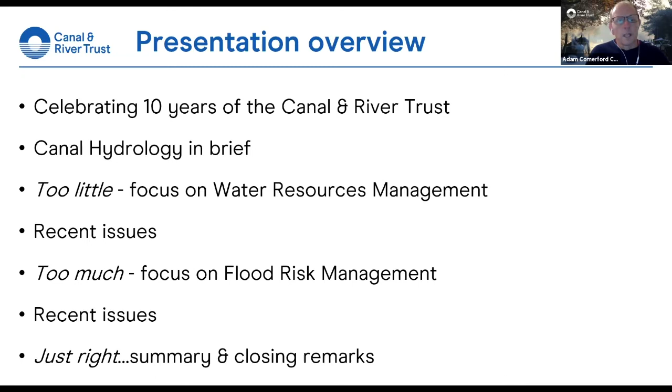I'll then go on to talk a little bit about what happens when we have too much water, which probably will be not far away if weather patterns carry on as they are, and some of the issues we've had with excessive water in our system. And then really just wrap it up with some closing remarks, a summary and a chance for questions. And then I'll hand over to Neil. So if I just get this started, it's a short presentation. You may have seen it if you attended the Trust annual public meeting, but I'll run it anyway. It's only a couple of minutes, so please sit back and enjoy this one.

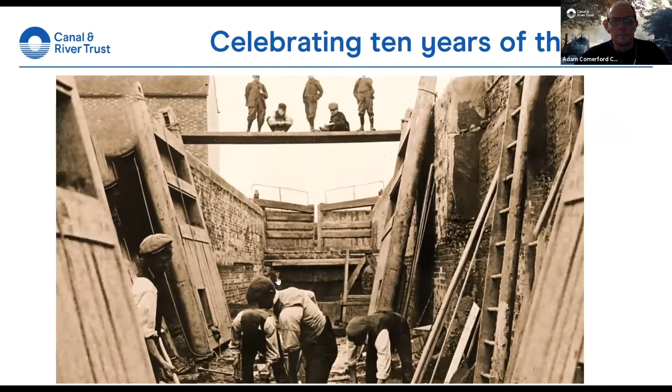More than 200 years ago, great engineers and thousands of navvies made something truly spectacular. They achieved feats of industrial engineering never encountered before, taking water up hills, across valleys, powering the industrial age. When they were creating this 2,000-mile network, the finest example of industrial heritage in the world, they could never have predicted the role that canals would still be playing in our lives over 2 centuries later. Stretching from London to Lancaster, Brecon to Boston, the former motorways of the nation are continuing to shape the lives of millions of people today, but in new, completely different and exciting ways. They're giving us somewhere we can live, relax, visit, get active, spend time together, get close to nature.

Today there are more boats and people on the water than ever before. Our canals are not just about the past. They have the potential to help power our future too. They provide a vital source of water to help our crops grow. They're a source of renewable energy. They support a wide range of businesses and jobs.

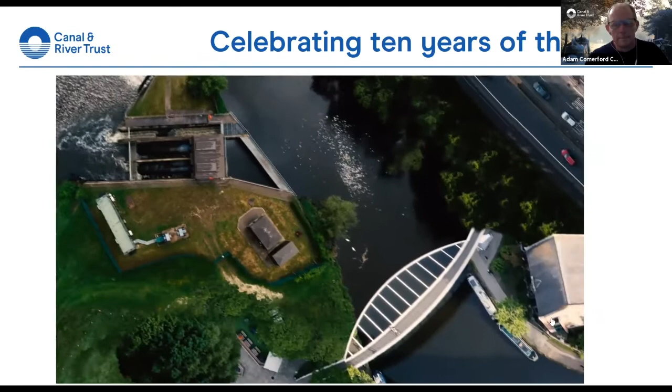Using the energy stored in the water, they're helping to keep our cities cool and our homes warm. Broadband cables, gas pipes, electricity lines tucked under towpaths and bridges traverse the country, bringing energy into our houses and businesses. And making this happen is one charity, a charity powered by millions of supporters, Canal and River Trust.

We are the people making life better by water. We are the charity that provides much needed green and blue spaces in our most built up areas. We are the charity caring for these historic, precious and fragile structures out in the open, exposed to the very worst that our weather and climate can throw at them. We are the engineers, the lock keepers, the litter pickers, keeping these waterways open and bringing them to life for boaters, for local communities, for you.

Our amazing charity cares for these wonderful waterways, but more help is desperately needed. Your donations, your time, as well as the vital support from partners and government if they are to survive and thrive. So we all have a back garden to call our own, a special place on our doorstep to use and enjoy. Together, we can make it happen. Together, we are Canal and River Trust, making life better by water.

So hopefully that sets the scene for just why the Canal and River Trust role is so important. But within that, water is the lifeblood of our canal network. If we don't get the right water supply in the right place, then we really do struggle to deliver all those things we've just seen on that video. I'll talk a little bit about the basics of canal hydrology, and many of you on the presentation this evening will be fully aware of where the water comes from, but some of you won't. So I'm just going to spend a little bit of time explaining the complex interactions we have with our water supply system across the Trust's network.

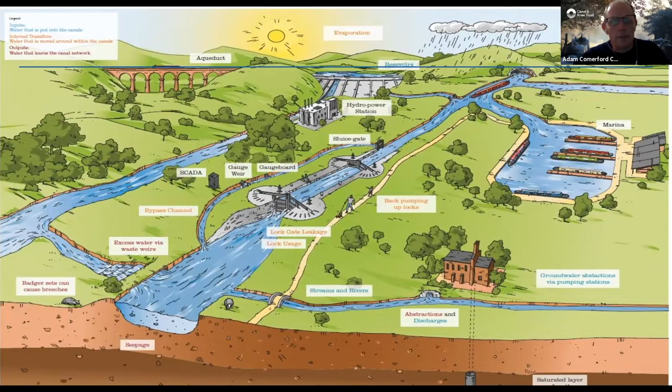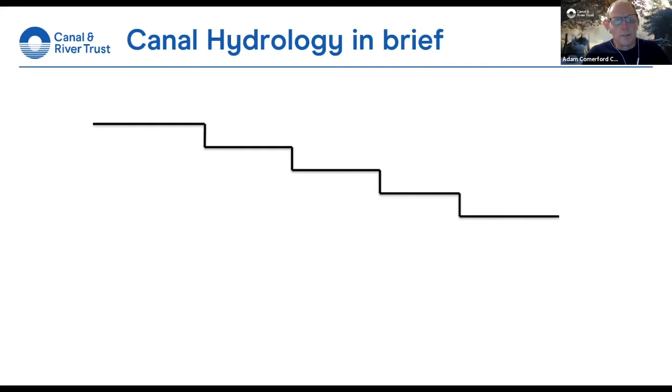This diagram shows a few examples of where the sources of water are, how they move around, and perhaps helps people to visualize how we manage water. Another way of expressing it, and this is a slide I've used a few times, and probably, Roger, it may have been one I used 5 or 6 or maybe even 10 years ago, but it really gives a snapshot of the basics of canal hydrology and why the challenges are so complicated at times. When we look at our canal network, we talk often about summit pounds, and we talk about the challenge of putting water into the system.

We've got around 70 reservoirs, 72 reservoirs that supply about half of our water resources overall across the Trust network. Some canals have lots of reservoirs, some canals don't have any reservoirs at all, but together they add up to about half of our water supply. Groundwater can be locally significant. That's water pumped from deep underground, and that does add up to only about 7% of our total water resources, but it's very useful, and it can weather the storm, so to speak, of droughts. If I'm mixing my metaphors a little bit there, because groundwater can be much more resilient in the face of periods of prolonged dry weather.

We do rely heavily on what we call feeders. So those are streams and rivers that are pumped or fed by gravity into our network, and that adds up to over 30% or around a third of our water supply for the system that we manage. And I'll talk a little bit more about some of the challenges we have with feeders in a few moments. We also benefit from what we call discharges into the system. So there are a number of places where we receive treated effluent and other runoff into our canal network. Sometimes we actually get revenue, we get money for receiving that water, and that can be particularly useful because where it flows into our system, that can be a useful source of water.

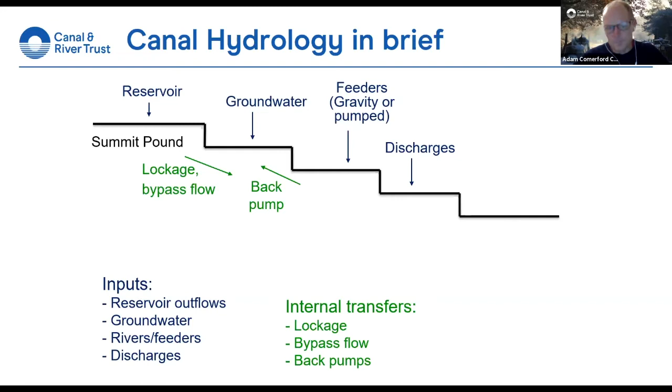Once it's in the system, water moves around with lock usage, so what we call lockage, and bypass flows, water passing around locks. But also in some locations we have back pumps, so we can recirculate water and move it back uphill to be used again for boat movements through the locks. And why are we doing all this? Well, the main reason is because canals use and consume water.

So one of the biggest uses of the water is the losses. Our canals are 200, 250 years old. They're not always lined. The water does leak and seep through the bed of the canal. It always has and probably always will do. But on top of that, we get evaporation, we get vandalism, we can get boater misuse where paddles are left up and water goes to waste.

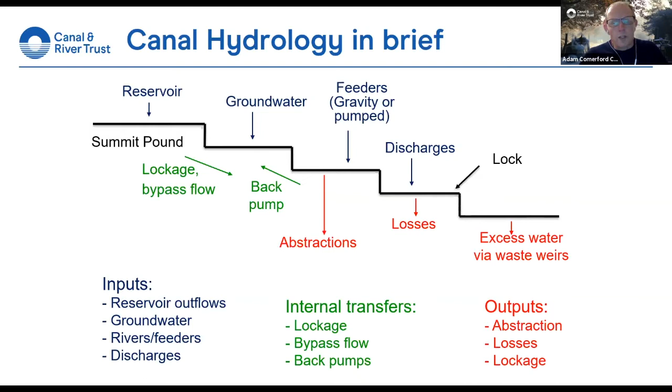We also have to supply water for abstractions, but we only do that where we've got surplus water. And if we're not using that water and it's not being lost through evaporation or some of the other leaks and seepages that happen, then excess water will eventually find its way back to rivers and streams via waste weirs, or perhaps in the case of some canals, exit points into rivers and estuaries or docks. So this slide really shows some of the complex interactions and how we manage them on a day-to-day basis.

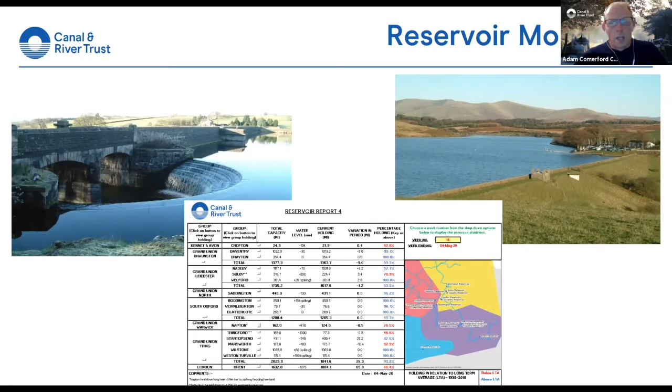One of the first things we do on a weekly basis is monitor what's happening with our reservoirs. So with those 72 reservoirs I talked about, every week we're recording the water level in the reservoirs. We're working out exactly how much water we've got in each reservoir from one week to the next, looking at that change over time. And we report that internally. We put it on our website once a month for interested individuals and organisations to look at, to see how our reservoirs are faring in the face of drought events. But also sometimes our reservoirs have to get drawn down for engineering works as well.

And that reporting and monitoring of pump usage is very important, because the energy costs of doing this pumping are very significant. We spend about £2 to £3 million a year, and that's based on previous figures. The most recent year, once we get to the end of 2022, will probably be much higher because of the price of energy. So the reason to spend all that money is obviously to keep the canals at the water levels we need for navigation, and that's a critical part.

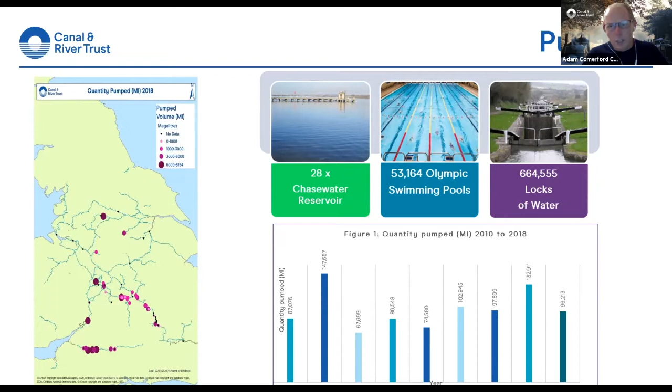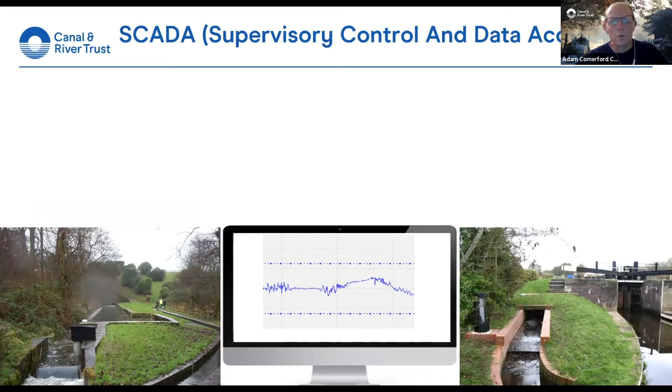And one of the things is the pumps rely a lot on what we call SCADA. SCADA is our supervisory control and data acquisition system. So in simple terms, it's telemetry. It's those little black boxes you can see on the two pictures at the bottom of the screen. Little black boxes next to the canal, scattered all over the place. 600 of these record water levels and flows, and they measure how many times locks are used. And we can get that data from the telemetry system onto our computers, onto our phones in real time. We can download it and we can look at that information.

It also triggers automatic alerts and alarms. It tells our local teams if there's high or low water levels, or perhaps a failure in a critical piece of equipment. And it also controls sluices and weirs and pumping stations. So these things are operating 24/7, 365 days a year. They don't go on holiday.

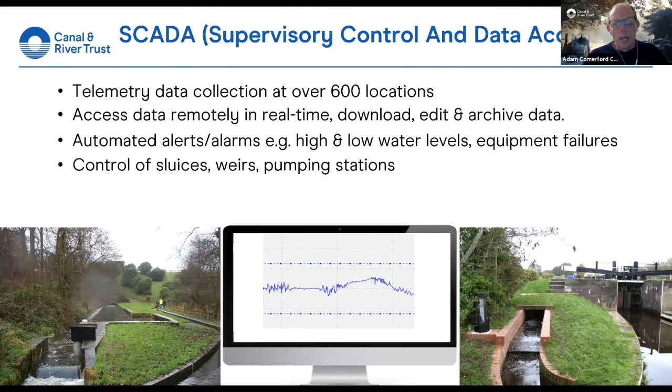And anyone in the trust can have a look at this data and can click on any of the points and see more information. You can see the trends of the long-term pattern of data, and you can configure the alarms and the settings all from the comfort of our laptops or our armchairs.

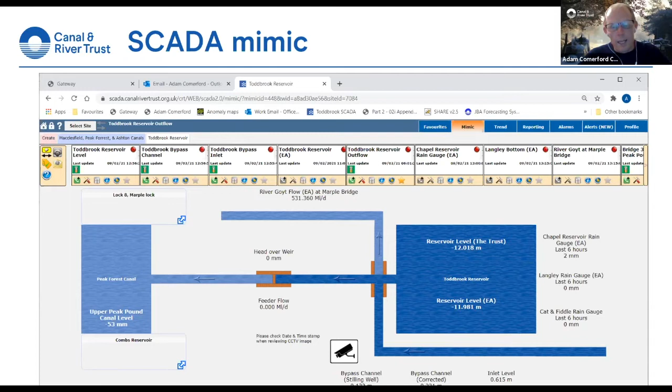And one of the things that we record through the telemetry system is the lock usage, so what we call the lockage, and we produce an annual lockage report. A lot of users find it's particularly interesting to see which are the busiest locks on the system. And we've got about 170 places where we record lock usage across the network.

Although there's about 1,500, 1,600 locks, we don't have a lock counter everywhere, but we've got them on all the key lock flights. And the simple assumption is that if a boat goes through the top lock, it probably will travel all the way down through a lock flight. So if we measure the lock usage at the top lock, that's probably representative of the lock flight usage.

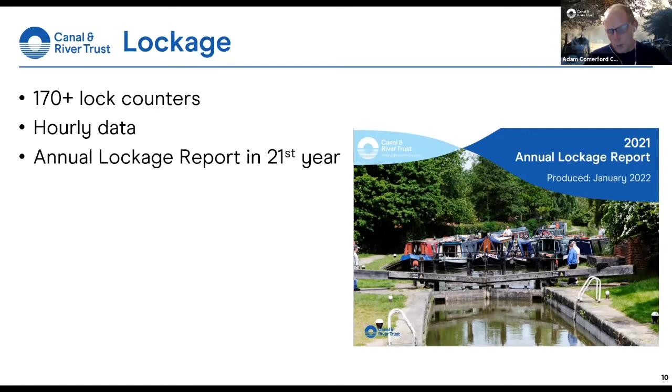It records hourly data, so we can get a real snapshot. We know which locks are being used at 5 in the morning on a lovely summer's day, or which ones are still being used at 10 o'clock at night on a summer's evening. And we've been producing this report now for 21 years. So pretty much my entire career of working with the trust, we've been producing this report showing that trend and that change in lock usage over the period.

And one of the things we try and do is obviously help inform things like the lock gate replacement program, because those locks that are used more often are going to take more wear and tear, more bashing and battering with use, and will probably wear out more quickly. So Neil will talk later about how we do our inspection program and how we prioritise, and the lock usage data is one of the factors.

It's a continual process, and again, Neil will talk about how many winter stoppages we do and how many lock gates or lock leaves we replace each winter, but it's somewhere around 120 typically. It varies from year to year.

Lock gate leakage can really cause an impact on our water resources, and especially where we've got back pumps, it's very inefficient to be pumping water in a circle, just pumping water above the lock for it then to leak back through the lock gates. It's really important that we prioritise our investment in lock gates, particularly where we're incurring expensive back pumping.

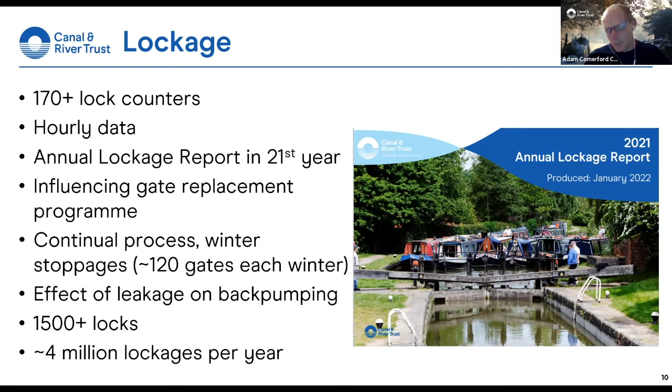And like I say, the 170 lock counters basically give us a representative sample of our 1,500 locks. And in total, that adds up to over 4 million lockages per year. So all those lock gates are taking quite a pounding. And it's a great statistic in terms of how well the network is being used and enjoyed by boaters and boating taking place across the entire 2,000 miles that we care for.

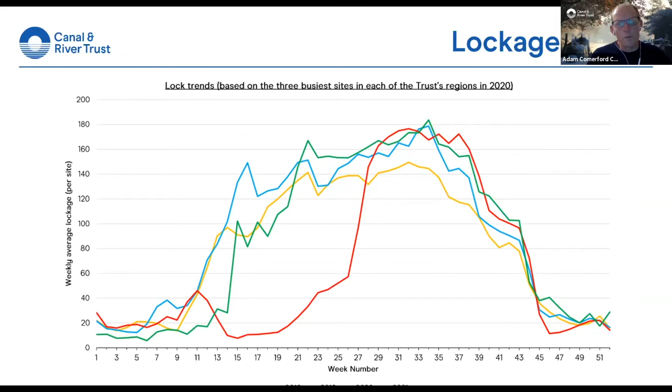But when it comes to managing water, whilst a lot of the work we have to do can be very reactive from one day, one week to the next, we also try and have a much more strategic approach. So there is a long-term plan. And what we've got in place and we're currently reviewing and renewing is our water resources strategy. So the last strategy we had was covering the 5-year period from 2015 to 2020.

And it really set out for the first time for the Trust exactly how we manage water on a day-to-day basis, but also how we're looking at the long-term pressures on our water, things like climate change, and how that could really impact on our allocation of water. And we do that in our water resource strategy by subdividing the network into what we call hydrological units.

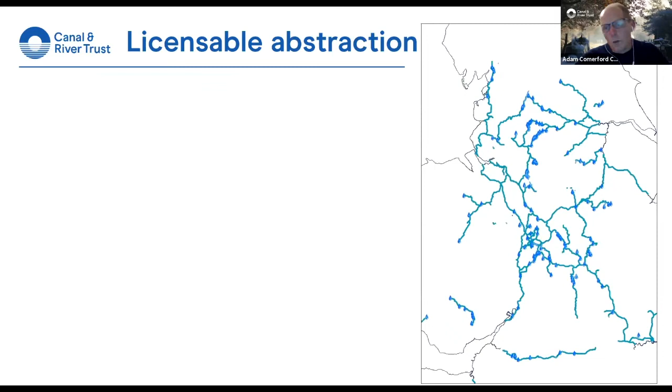And that could include a restriction on how much water we're allowed to take, when we're allowed to take the water, how we record how much water we take to supply the canal network. So it's a significant extra burden for the trust. And it really does potentially affect our overall water resource reliability for the long term, because we are now part of this regulated licensed system. And those abstractions which are licensable are all over the country. There's about 155 applications that we've submitted.

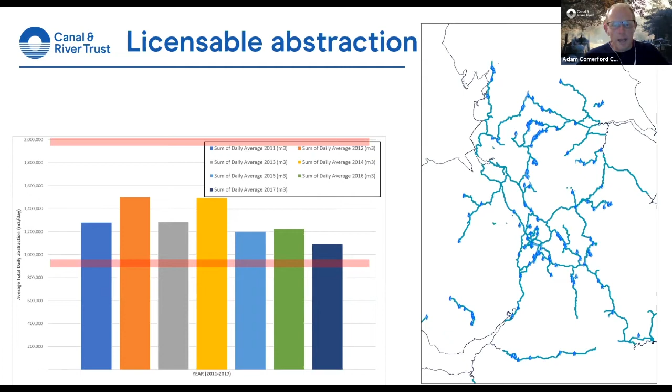That's how responsible we have to be, because the scale of our use of water is very significant. And it's no surprise that the regulators, the Environment Agency, are certainly asking lots more questions now they've seen this data set, just appreciating how large our abstractions are and how significant they can be, particularly in some catchments.

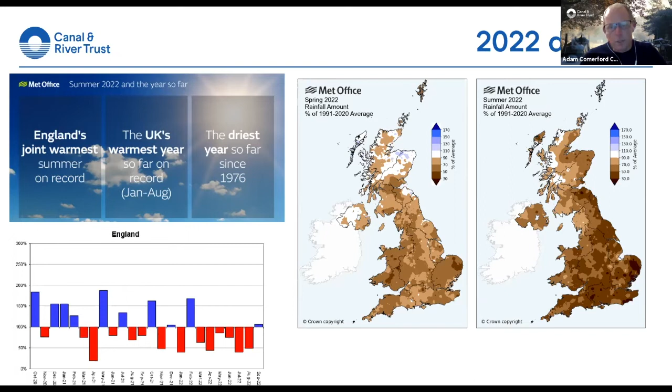The maps on the right show just how dry it's been. So the 3 months of spring and then the 3 months of summer are shown on these two maps from the Met Office. And basically, the darker the brown means the drier it was, and it's expressed as a percentage of the long-term 30-year average. So you could probably say it's no surprise that we've had hosepipe bans for many millions of customers of the water companies in England and Wales, and why the Trust has faced some significant problems of water resources supply for our canal network.

The driest August since 2003, in England at least, and so the driest August, and as well as the driest summer, the hottest summer, the driest 7 months. There's plenty of superlatives and stats I've put on the page here. And really, August was an exceptionally dry month, and September also. Through October, we started to see some signs of recovery, which is very encouraging.

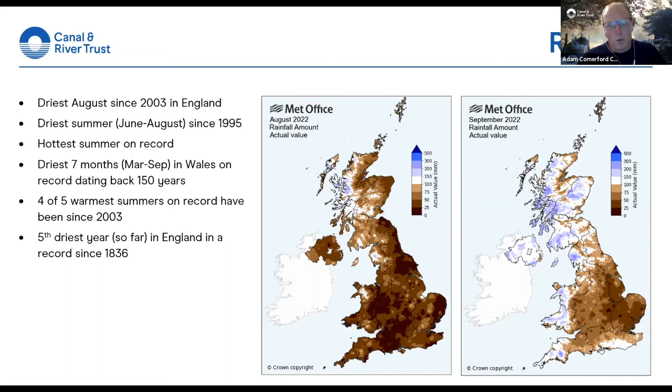But it's that prolonged dry weather that's really put a massive challenge onto the Trust in terms of supplying water to maintain navigation. How do we manage the impacts of drought? Well, obviously, all the things I talked about in terms of the monitoring and the computer network and our computer models can allow us to simulate what might happen. But as we've been going through the drought period, one of the first things we have to start to do is look, can we save water more dramatically?

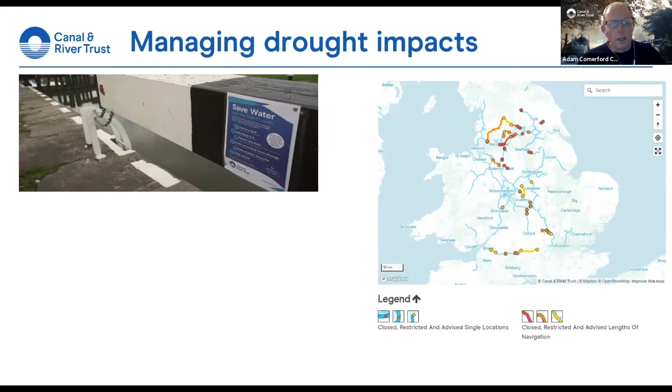So bringing in lock usage restrictions, reducing the available opening hours for lock usage, is one of the tools in our toolkit. And it sits alongside everything else in terms of the modelling and that coordinated management response. We have drought plans within the Trust that set out for each canal how we manage a particular drought event. And on the right, we've got our screenshot of the mapping that's available on our website now. This is a screenshot from a few weeks ago, but it basically showed all the places where we had restrictions or closures to navigation.

And in my 20+ year career, this has definitely been the worst summer in terms of the percentage of the network we've had to restrict or close due to the water shortages we've faced. At its peak, we probably saw about 18% of the network was either closed or heavily restricted due to the water shortages. And closing the canals to navigation doesn't mean that we can then turn off the taps and not supply any water and just walk away and forget about it.

We still have to maintain safe levels for boats to moor in our canal pounds, even if locks can't be used. But also we've got the ecology and the biodiversity of the canals to think about as well. And we can't simply turn off the taps. Also, when we've got significant reservoirs, as the water levels get lower and lower in the summer months and we begin to run out of water, we then face problems in the reservoirs themselves, because there's an ecology and a biodiversity in our reservoirs that can become really stressed with high temperatures and low dissolved oxygen, especially where we've got fish stocks in some of our reservoirs.

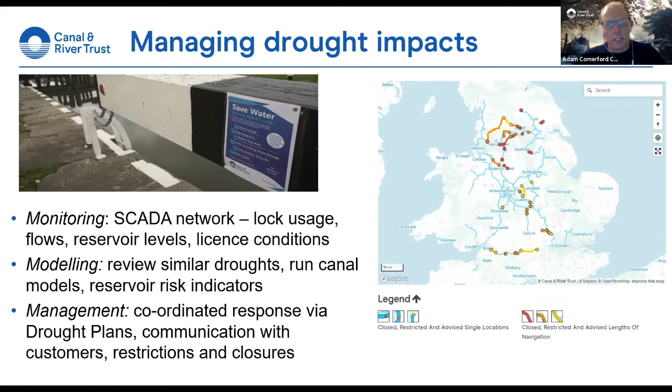And on the Leeds and Liverpool, for example, some of the reservoir holdings got down to as little as 10 or even 8% full. So we'd used over 90% of the water before it started raining in the last few weeks. An example of that is this, what we call our risk indicator graph of the Leeds and Liverpool Canal. So the dark black line with the blobs is the weekly water level, percentage holding for the Leeds and Liverpool reservoirs. There's about 6 or 7 reservoirs that together supply the Leeds and Liverpool Canal.

And you can see as we went through the year, starting week 14, which is around Easter time, as we went further through the summer, the reservoir holdings got lower and lower as we fed the water into the canal, as we would do every year. But the lack of inflows coming into the canals directly or into the reservoirs meant, along with the drawdown, that we were getting water levels lower and lower, until we reached sort of the midsummer, and we had to take the difficult decision to close the canal entirely.

And when we did that, closing it to navigation and sealing up the lock gates also allowed us to reduce our demand for water. We could just about squeak through the remainder of the summer until we saw the refill that's showing in the last few weeks, as the water levels have started to recover quite considerably. The different bounds on the graph are what we call our drought trigger zones. So as the water levels in the reservoirs drop further and further, it gives us an indication, based on historical computer model simulations, of what the risk is that we're going to run out of water.

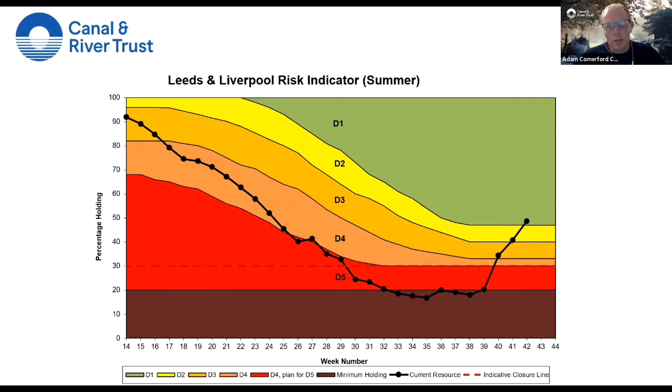So if the reservoirs are getting into the red zone very early in the year, then it's much more likely that we'll have to bring in closures and we face the prospect of running very short of water. By contrast, the Oxford and Grand Union system, so that is, as it suggests, the Oxford Canal and the Grand Union Canal primarily, as well as the Coventry and the Ashby canals, saw a much more gradual drawdown through the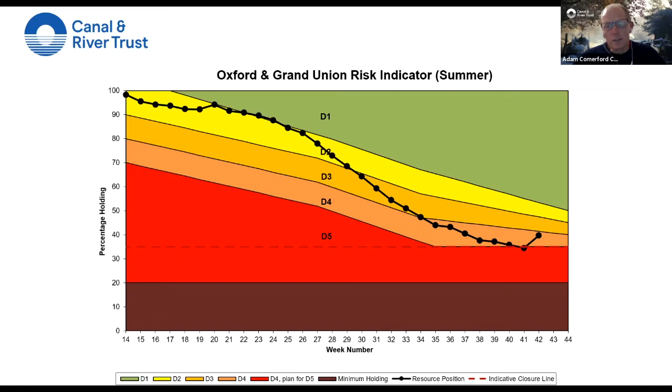summer months, but it's only just in the last week or two started to see some of the green shoots of recovery in terms of the water levels starting to pick back up again. But the water levels didn't get quite as low, so they bottomed out at about 35% full, which is still not a lot of water left in those reservoirs as we got towards the end of the season. So that's a little bit about some of the challenges of not enough water.

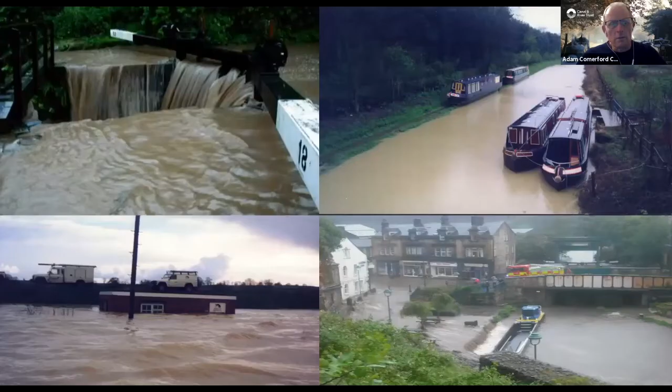The flip side of the coin for the Trust is what happens when we've got too much water and some of the challenges we face with flood risk management. And a lot of people think the canals don't flood. They think they're a man-made system, they're controlled, and they can never flood, never have problems. But I think these photos going back over the last 10 or 20 years just put that assertion to rest. Canals do flood, and if there's excessive water entering into our canal system, either from direct rainfall or nearby rivers and watercourses coming into the canal system, it can cause significant problems for flooding of our network.

And one of the biggest risks is what we call overtopping, so water overtopping into our system and then back out of the canal, and that can occasionally cause breach events. So again, we rely on these 3 M's: the monitoring, things like rainfall data, weather forecasts, and our SCADA network to tell us where there's problems of high water levels, but also computer modeling to look at previous flood events and try and understand the risk and find out where we should invest more to make our network more resilient.

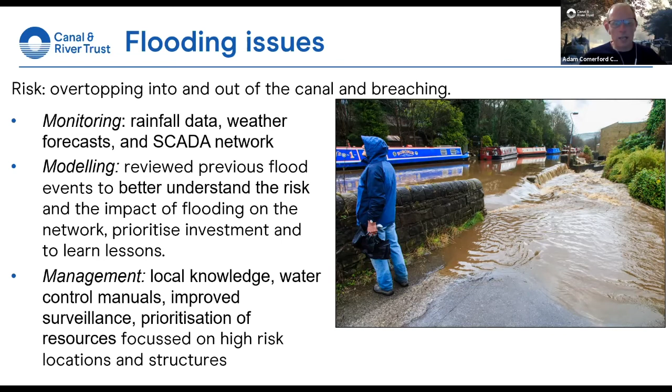And then it's pulling that together in terms of the management, how we apply local knowledge going back many years. A lot of our staff have been around a long time, passing that knowledge on, as well as working with other partners and agencies, capturing the information in our water control manuals, those operational guidance tools, and how we do things like surveillance, and we prioritize our resource based on which are the highest risk assets where we are most likely to have problems with excessive water levels.

And not that long ago, we had something called Storm Christoph, and these 2 photos show just how quickly an event can move. So this photo on the left was taken on Wednesday, the 20th of January last year, so 2021, at about 4:18 p.m. So we'd had a weak spot in the canal, water level was overtopping, and it started to erode the canal bank away. At that point, we were suffering major flooding problems across a lot of the northwest of the country. Roads were impassable, couldn't get staff or vehicles or any plant or equipment out to a lot of our canals that were facing flooding problems.

By the next morning, the canal had breached. The water had continued to flow. It had scoured out and eroded the base of that very thin piling. I don't think you'd even call it piling. And you ended up with a breach event. Thankfully, nobody was hurt in this event, but it did, of course, take us a little while and a significant amount of money to repair that breach on the Shropshire Union Canal.

And also, you notice there was snowfall that night as well, so that was compounded. We had one of the worst storms in recent memory in that part of the country, in terms of excessive rainfall, and then it very quickly turned into a snowfall event as well, which made roads and travel very difficult for staff and emergency services.

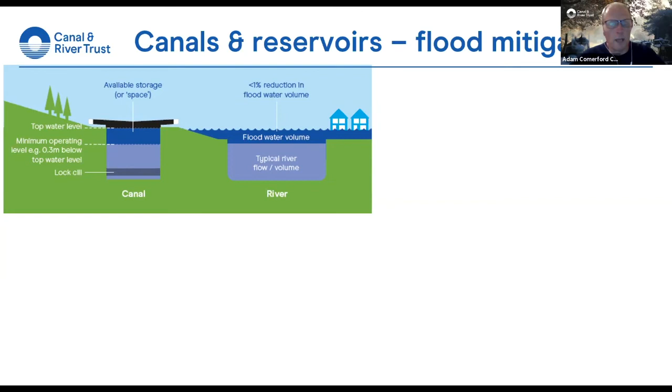The reality is, in most cases, that's not possible. The canals were never designed to convey large flood flows. They don't actually have huge capacities when you compare them to the flow of water that happens in rivers and on floodplains. The other question that's asked a lot is, can our reservoirs do more to hold back water? And it's not just us that gets asked that question. Public water supply companies who have got significant sized reservoirs are always asked the same question: can their reservoirs act to hold back flood flows, to control the feed out of reservoirs and perhaps reduce the risk of flooding?

And the short answer is yes, in theory, but a lot of our reservoirs are significant in terms of their age. So the average age of our reservoirs is over 200 years old. When you compare that to the water industry, their average reservoir age is about 120 years old. So our reservoirs predate the water industry, and the engineering that our reservoirs have underpinning them is of a previous generation in terms of civil engineering. And therefore, it would be much harder and certainly much more expensive to ever redesign and repurpose our reservoirs to provide that flood attenuation. But there are places where it does already happen.

So take Brent Reservoir in northwest London. The reservoir level has been held down for many years, and that's one of the very few examples where we do this. And we've done it since the Second World War. And the reservoir is held down at a slightly lower level, and it provides a little bit of flood attenuation to the River Brent downstream. It makes a modest difference, but in significant flood events, the reservoir would still fill up once you get major inflows from a rainfall event.

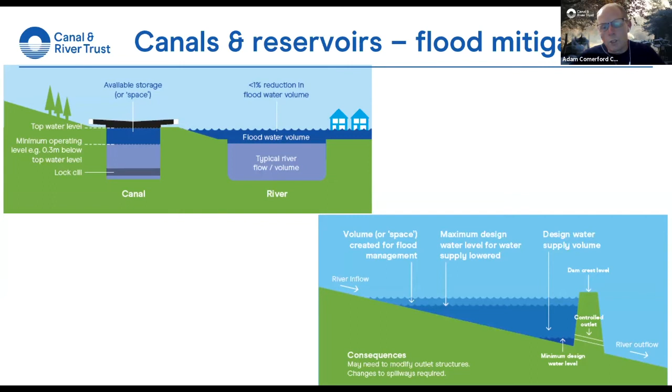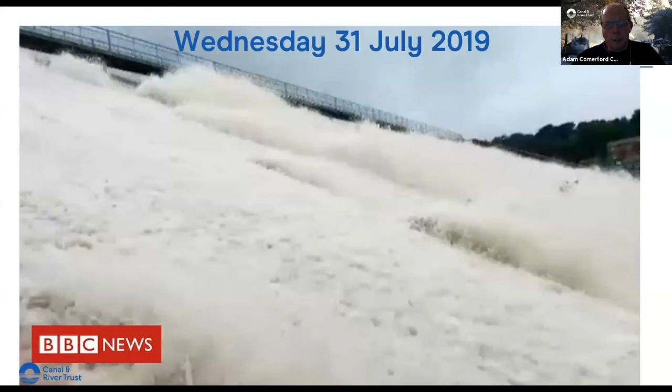And some of these images just show the scale of the event. A significant rainfall event generated a lot of flows coming from the catchment, and the auxiliary spillway initially did what it was designed to do, which is safely convey that water out of the reservoir, down the spillway and away to the River Goyt and through the town of Whaley Bridge. The problem was that after the event, which is shown on this graph, the scale of the event was so significant that it caused damage to the spillway.

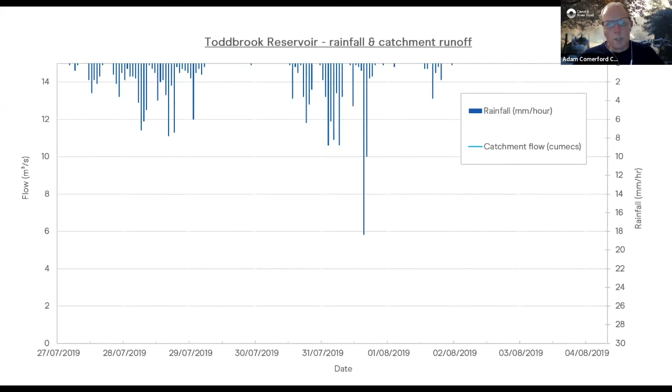So the rainfall event was actually two distinct storm events. These are the rainfall bars on the top of the graph, and what we have on the blue line just appearing here is what we call the catchment flow. And it's expressed in a unit called cumecs, and a cumec is a cubic meter of water per second. So another way of expressing that is 1 cumec is 1 ton of water every second.

So at the first peak of the flood event, there was about 11 tons of water entering that reservoir every second. And then in the second peak of the event, it was over 14 tons of water every second through the peak of that event. And it was that significant volume of water coming into the reservoir that caused the auxiliary spillway initially to flow and then caused the damage to the spillway.

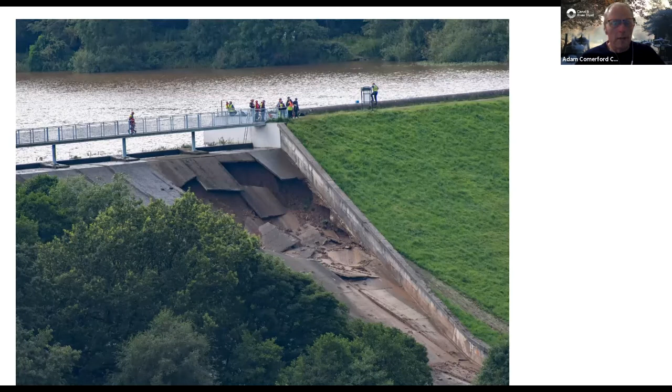And the spillway damage was quite apparent once the water levels began to subside. And after the event, immediately after the event, we could see just how bad the damage was. And this led to a significant emergency response from ourselves and many other partners and agencies to begin to lower the water levels, because the risk was that if another flood event took place, that spillway had been significantly compromised.

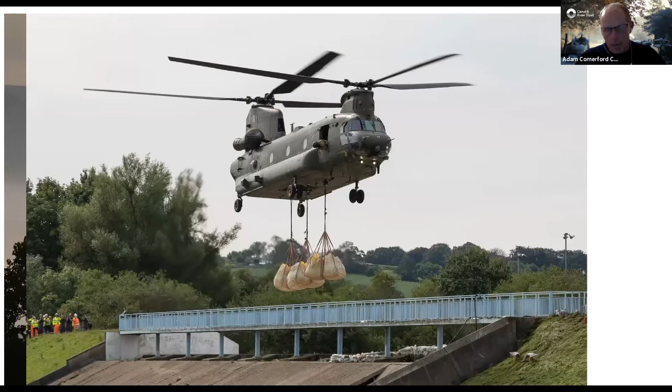And for those who were watching the BBC News at the time, the Army supported us with Chinook helicopters dropping bags into the spillway to try and shore up the spillway. Even Boris, remember Boris? He came along to get a photo opportunity as the event was still unfolding, whilst the RAF were helping shoring up the dam, the spillway, to avoid the problems.

But in parallel, the activity we were doing was trying to divert the inlet of the reservoir. So you can see the Army, Royal Corps of Engineers were brought in to create a short-term temporary diversion weir at the inlet of the reservoir to send the water around the reservoir. We have a bywash channel, and you can see a small sluice there to the left of the image. And that feeder channel, that bywash channel, was designed to convey flows around the reservoir. So there's significant effort to shore up that bywash channel and make sure it could take significant flows to avoid water coming into the reservoir.

And in parallel, the pumping operation began to lower the water levels as quickly as possible, because by lowering the water levels, we're able to reduce the pressure on the dam and create that much needed headroom, that storage of water in the reservoir in case another flood event was to come in, to try and avoid the likelihood of that spillway operating again, because we didn't know whether it could cope with another significant flood event passing water down the face of that concrete spillway.

So we installed 11 major pumps into the reservoir with support from other agencies, including our contractors, and the fire brigade also installed their pumping to try and lower the water levels as quickly as possible. And basically we worked day and night to lower the water levels. So the reservoir level was dropped from full, what we call zero, or top water level, down to about minus 11 meters, so 11 meters down from normal level to pretty much empty the reservoir over a period of days.

And it was all throughout that period that the residents of Whaley Bridge, I think over 3,000 residents in the community of Whaley Bridge, were all evacuated from their homes. One of the largest peacetime evacuations that the UK has seen, because the risk of the dam failing was still there until we could lower the water levels.

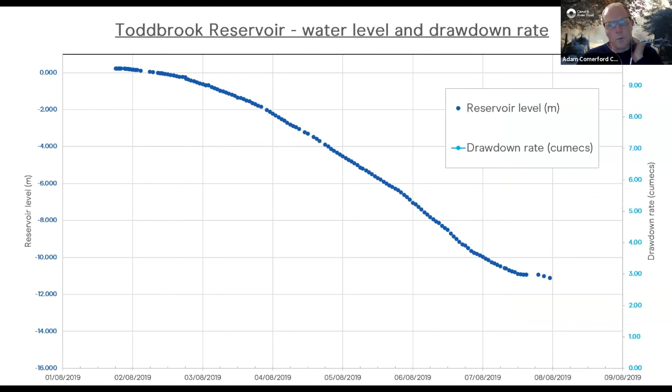The drawdown rate that we managed to achieve is shown on the blue dotted line graph just appearing there. So as we installed the pumping and had to keep repositioning the pumps as the reservoir level got lower and lower, we were able to draw the reservoir down. And you can see that flow rate is still nowhere near what was coming into the reservoir in that flood event initially that triggered the failure of the spillway. But that was the best we could achieve to get the water level down as quickly as possible to safeguard the downstream community.

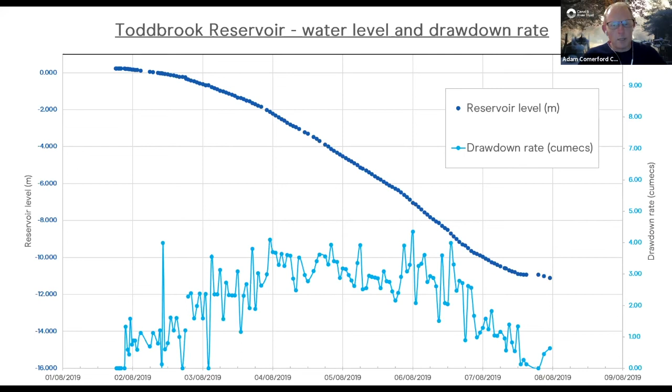So going forward, we ended up keeping the pumps in. They're still there now. They're monitored 24/7, and they allow us to keep the water levels down in the reservoir to stop the likelihood of the reservoir spilling. And we've now got a high-tech flood forecasting system in place. So this was delivered pretty much cutting edge.

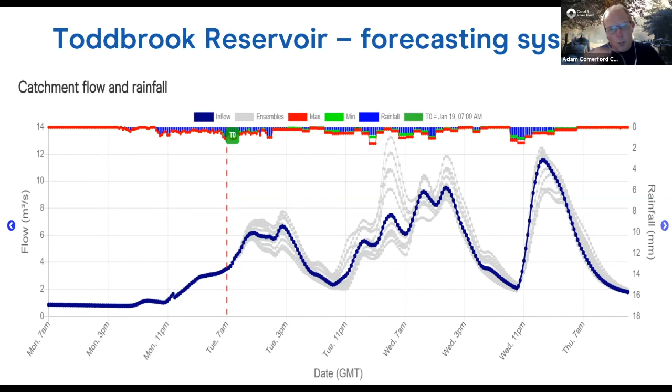But the good news was, of course, we were starting with the reservoir much lower, so there was much more storage capacity in the reservoir. And so the computer model we've got, the forecasting tool we've got, ran a simulation using those inflows, using those flow calculations. And again, from that same T0 time of the red dotted line, we could simulate what was the likely water level change. So bearing in mind the reservoir is always held down at minus 12 meters, so 12 meters below full. The water level is kept down there by the pumps. The projections, all of these grey lines, including the blue line, was what we thought was most likely to happen.

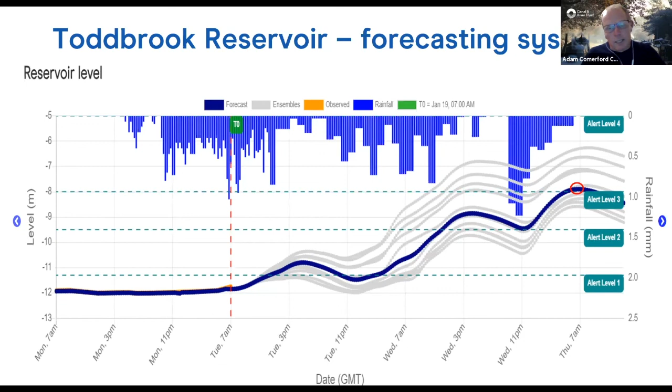And the reservoir did come up from minus 12 meters to minus 8 meters in that very short space of time, even with these 11 pumps permanently running through the night and day to try and keep the levels down. The reservoir kept rising with the sheer volume of water coming in from the catchment. But it showed how reliable the modelling system was, and we've still got that modelling in place, and it's running every hour, night and day at the moment, and will continue to do so until the works on the reservoir are finished.

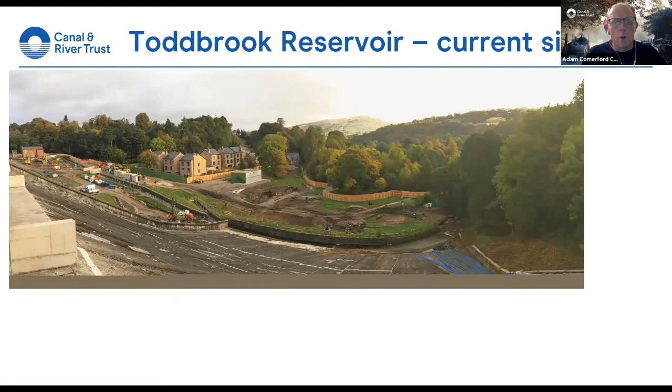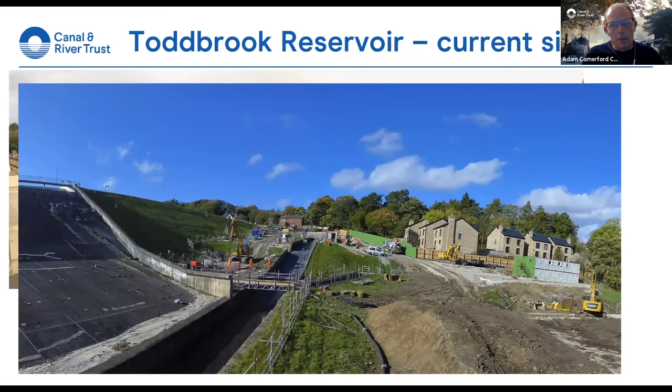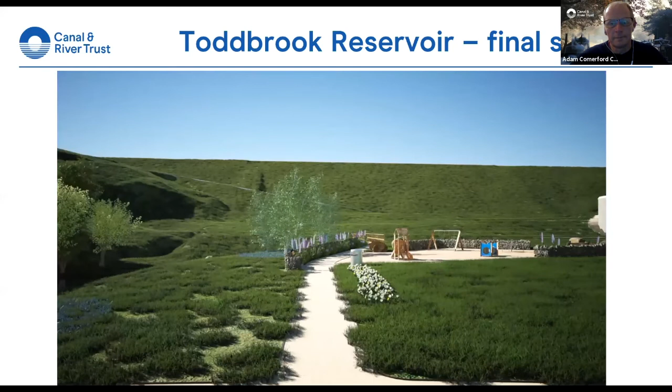And the reservoir situation now looks like this. We've had to start our major civils works on the reservoir. And these are images from last week as we start to reconfigure the dam and the spillway arrangement for the long term. So it's about a £15 million project, a construction project to deal with this for the long term. Significant re-engineering of the spillway arrangement. And my final slide should hopefully be a little fly through of what the works will look like. So hopefully you can see this, because there's no sound to this one.

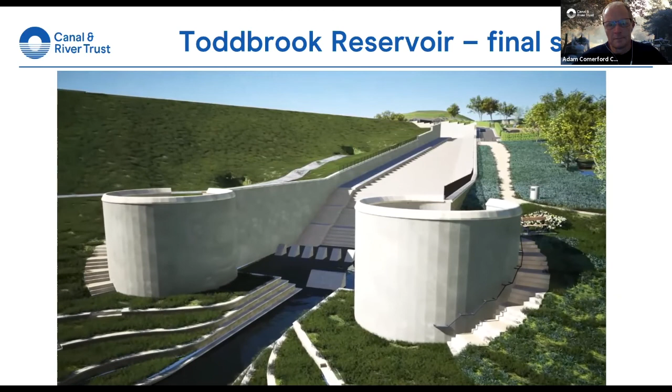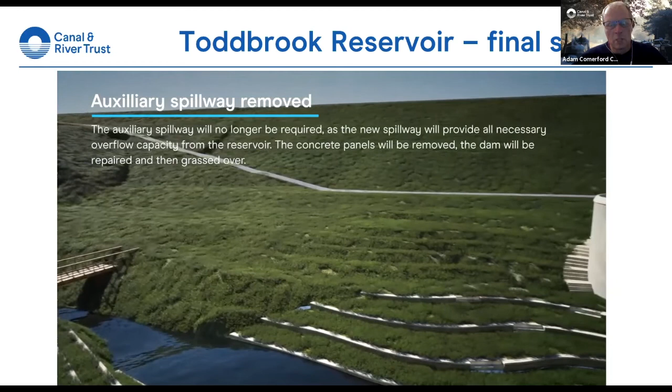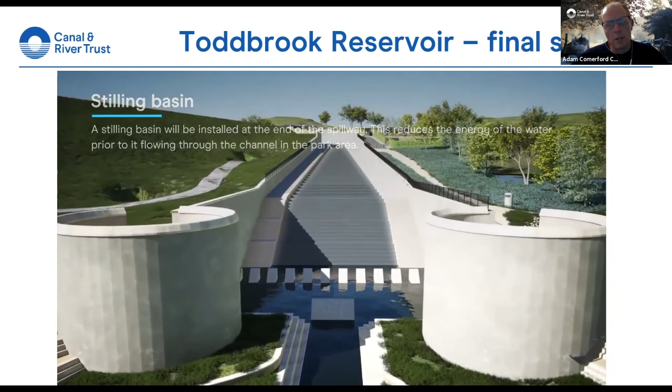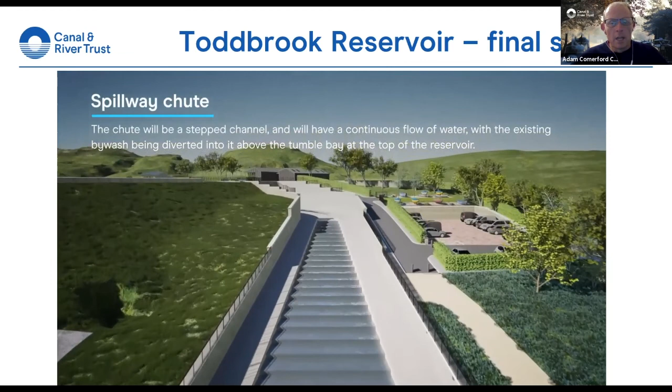So the reservoir will look very different once it's completed, and that spillway that failed will no longer be there once all the work is done. I should also add that on top of the £15 million of this construction cost, the trust has spent several million pounds already in the last 2 years just installing those temporary pumps and continually monitoring the reservoir to hold it down at the minus 12 metre level. So those pumps are a semi-permanent addition that are going to be there until these works are completed, and then the reservoir can be allowed to refill.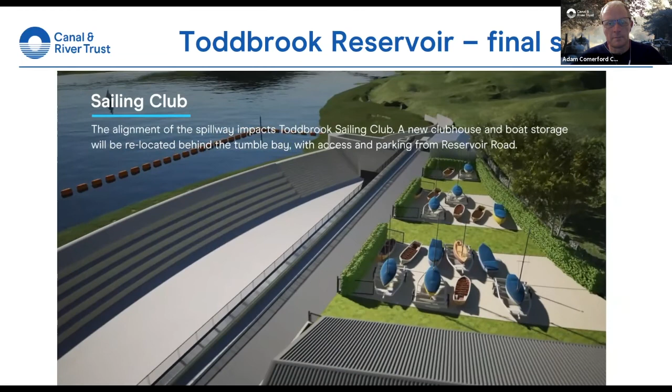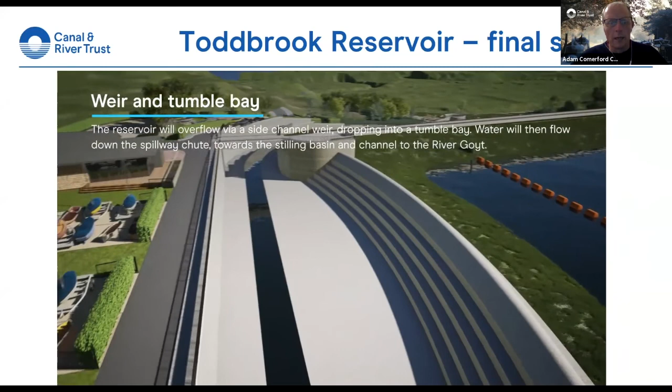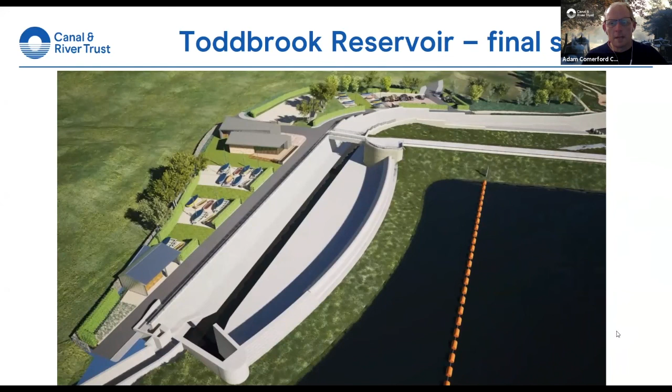So that bypass channel that I showed in some of the earlier photos will basically join into this tumble bay. So the anticipated completion is still another couple of years away. So it just shows the scale of the re-engineering we're having to do just for one of our 72 reservoirs.

So just to wrap up my final slide. Hopefully I've put across a flavour of how complicated water management can be, and how we try and manage those extremes of drought and flood. And those recent experiences I've showcased just demonstrate only too well the challenges we face. And on top of that, the future pressures that we can expect in legislation or climate change or funding will just add further to that challenge. But right at the heart of it is that technical expertise that we've got within the trust, within my team, but across a much wider organisation.